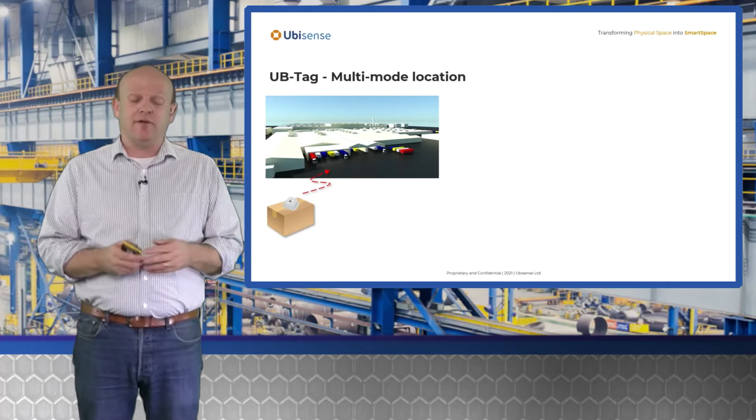In the loading bay, we may only want to know roughly where that item is. In that particular area, we can use Bluetooth Low Energy beacon sensing using a plug-in sensor like that. They're very, very cheap, to find out where that particular parcel is to within perhaps 5 or 10 meters accuracy. Then as that package moves through the facility, maybe it moves into a warehouse where perhaps we need slightly better accuracy, perhaps a meter or 2. There we can use exactly the same tag, transmitting Quuppa signals, and use the Quuppa location signal system to find out which particular area of the warehouse it's in.

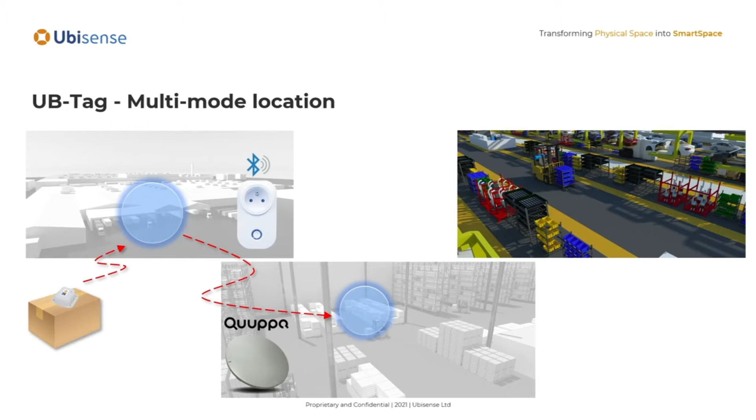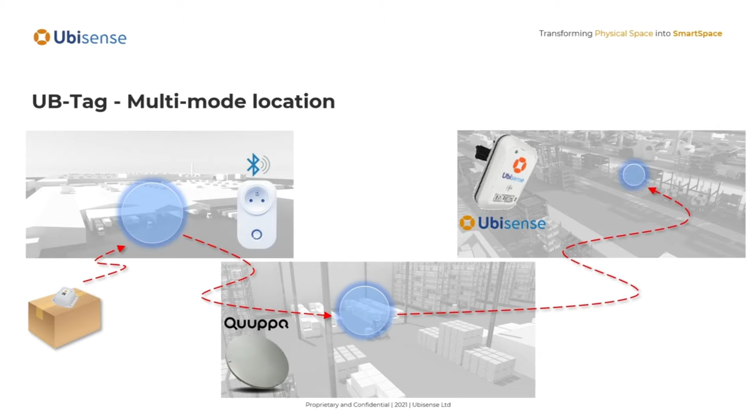We can also then use the same tag whilst the package is moved to line side, where there's lots of metal, it's a very challenging environment, and we need to know exactly where that particular item is, with the Ubisense system using our ultra-wideband technology to find very, very precisely where that tag is. So the same tag can be used all the way through the life cycle of a package moving around the facility using different location modalities to get the right balance of performance and cost whilst we're tracking it.

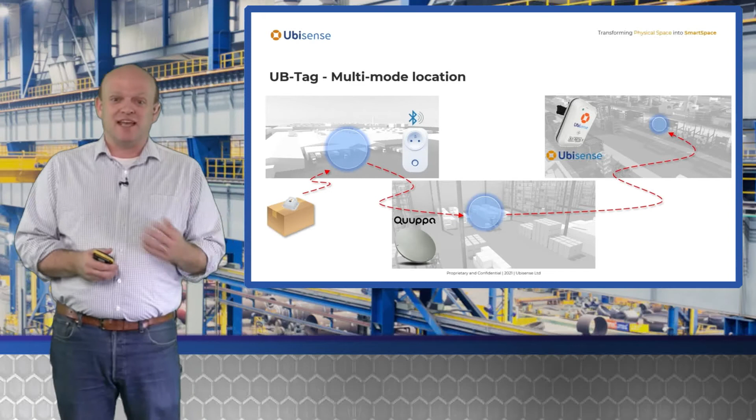We're doing all of these things simultaneously, and you might think that that means that the battery lifetime of the tag would be compromised. Not at all. The Ubi tag is actually our longest lifetime tag for a particular size of battery, and it's actually more than 6 times the battery lifetime of competing UWB tags using similar batteries.

So if we look at the battery lifetime of a tag which is transmitting ultra-wideband once a second continuously, so no cheating using accelerometers or anything like that to detect motion, something that's transmitting once a second all the time, then a Ubi tag will last for over 10 years in that mode. A competitive ultra-wideband tag might only last 1.6 years. So there's a big difference in the performance of the battery lifetime.

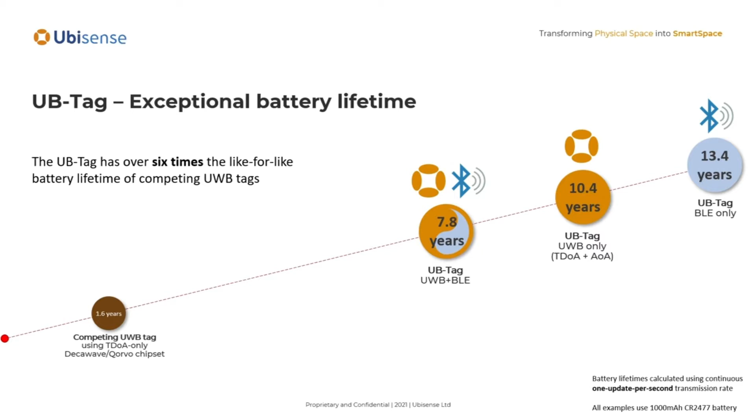If we look at the Ubi tag in BLE mode, it's over 13 years. And actually, we can do both of those things together, ultra-wideband and BLE, and still get nearly 8 years of battery lifetime out of a tag. So it's a very, very long-lived tag device. Now, because we're expecting these tags to be out in the environment for many, many years, we have to build them tough. And we've built the Ubi tag for industry.

It's very compact, so the main body of the tag is about the size of the top of your thumb. It can attach to anything and it's not obtrusive. It's tough, it's a sealed unit, tested to IP69K. Nothing can get in, it will last for a very long time. We've driven cars over it.

It has multiple BLE antennas, so it allows those technologies using BLE to work more effectively in tough industrial environments. And it has a magnetic button that allows us to interact with the tag by holding a magnet close to it, without actually having to put any kind of break in the case which might let in water or similar problems.

And it can be attached to all sorts of different items in lots of different ways. So we can use tie wraps, we can use screws, we can glue it to things. It even comes in different form factors where we don't have the mounting lugs, we've just got the main body, and as a watch type form factor that allows it to be used for tracking personnel.

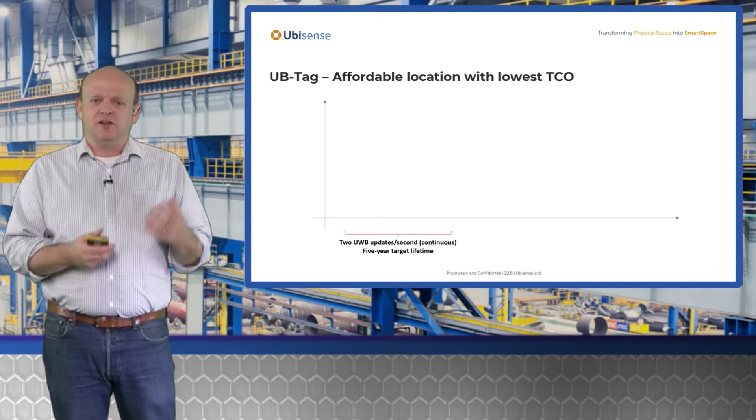It's also the lowest total cost of ownership tag that we can see out there. So if we look at an ultra-wideband application where we're using a tag for about 5 years, tracking it twice a second continuously, which might be the kind of level of performance we're looking for in a factory, the UB tag is cheaper than competitive ultra-wideband tags right from the get-go.

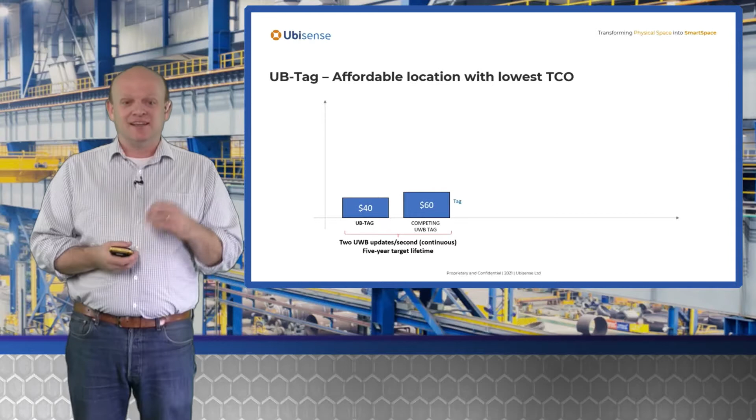But because we've got such a long battery lifetime, we also win in terms of the total cost of ownership. For that 5-year battery lifetime, the UB tag has got enough battery lifetime to get us through to the end with the battery that it had on day one. But that competitive tag needs its battery replacing roughly every year.

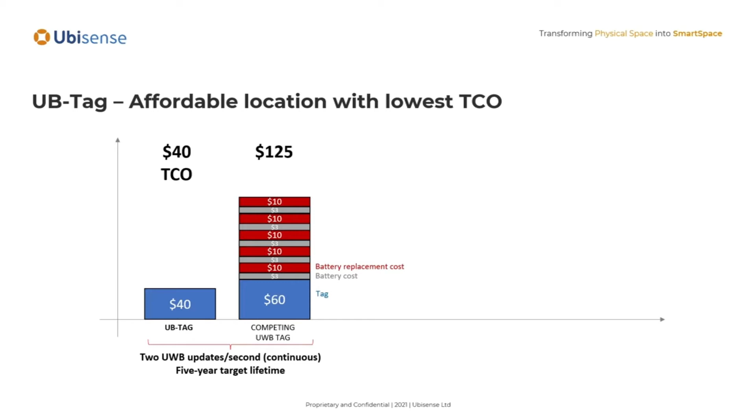So every year we have to pay for a new battery, and we also have to pay for the cost of going and finding that tag and bringing it back, changing the battery and putting it out there again. Now we've talked to our customers and that cost can be anywhere from $10 to $80 each time a battery change or battery recharge cycle is taken into account. Here I've assumed that it's at the low end of that scale. But by the time we've done that 5 times, you can see that the total cost of ownership of that tag over the 5-year period is more than 3 times the total cost of ownership of the UB tag.

And we can do a similar calculation in the BLE space. So although the UB tag is more expensive than competing BLE tags, they're extremely cheap, made in very, very high volumes, but they also have very, very small batteries. So the UB tag probably lasts about 3 times as long as one of those other tags. And again, by the time you've considered taking that tag, bringing it back, changing it for another one - these BLE tags tend to have sealed batteries - by the time you've done that a few times, the total cost of ownership of the UB tag is about half that of the competitive BLE technology. So not only is it our most capable tag, it's also the lowest cost of ownership tag.

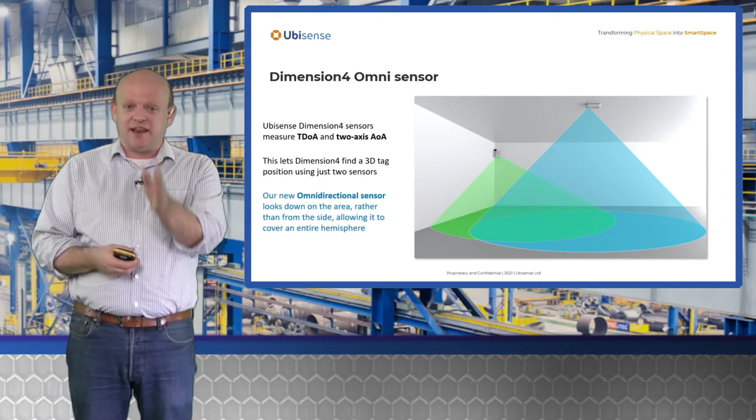Looking at the infrastructure side of things, we've introduced a new omnidirectional sensor. Our sensors are quite special in the ultra-wideband world in that we measure both time difference of arrival, the time of arrival of the signal coming from a tag at a sensor, but we also measure 2-axis angle of arrival - so we measure an azimuth and an elevation angle for that incoming signal. And that lets us find the position of a tag using only information from 2 sensors.

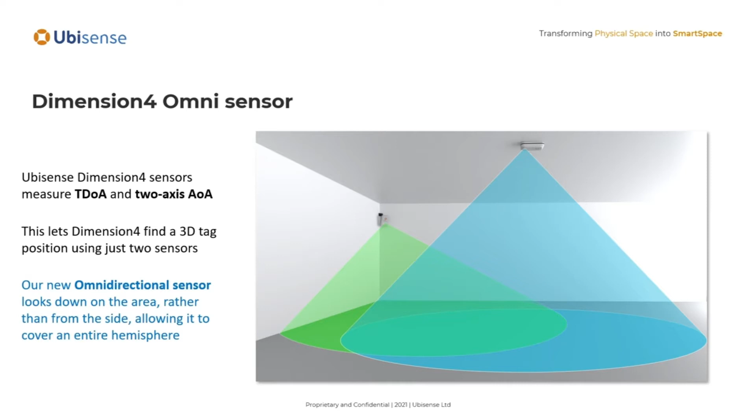But our previous sensors were directional, so they tended to be placed on a wall, looking into a space and cover a certain sector of the field of view that they were looking into. Our new omnidirectional sensor can be placed in the ceiling, looking down, and it has an essentially hemispherical field of view, so it makes it much more cost-effective to cover large spaces.

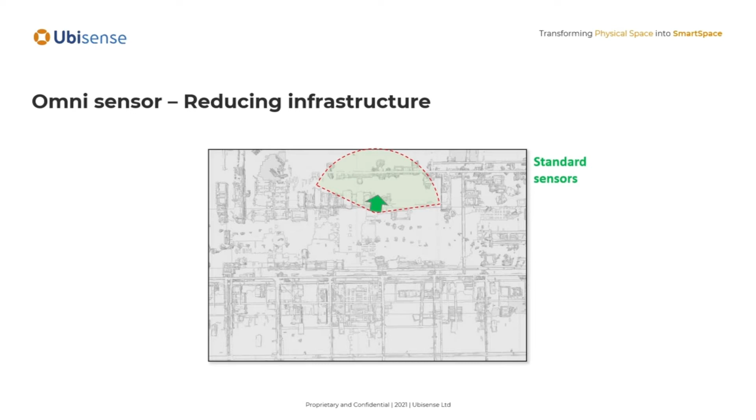I've got an example here. If we take this map and we say, what does it take to cover this with sensors? Well, if we use standard Ubisense sensors and place them in the middle of the space, each one would cover a certain field of view. And we'd have to connect that via cabling to a PoE switch, a power over Ethernet switch in a switch cabinet using Cat5 cable.

And obviously, if we want to cover large areas, we have to tile these fields of view so that the whole area is covered, and that involves a lot more cabling, more switches, and so on. But if we do the same thing using Omni sensors, we can do it much more cost effectively, with fewer sensors, fewer cables, fewer switches, and the total time to value is much reduced.

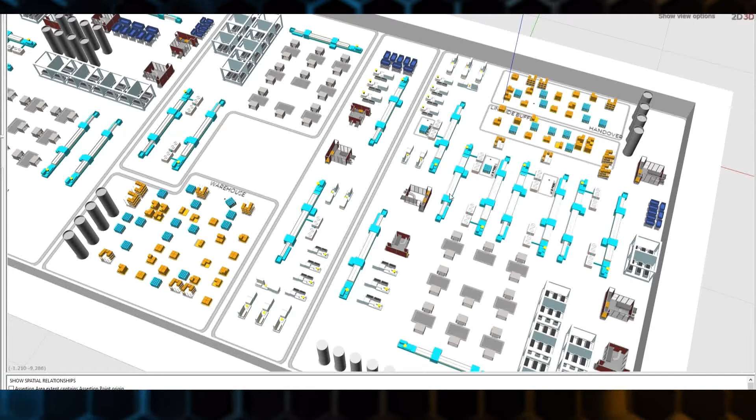Let's take a look at a typical manufacturing environment. Here we can see a Smart Space digital twin of a customer production environment. In this particular environment, what the customer is interested in is ensuring that the right materials, depicted by these blue pallets with stacked goods, are being delivered to the right locations in the material flow process at the right time. This is a really common problem, and many customers are looking to move away from traditional manual bookings into their ERP system using things like barcode scanners, because being manual, those processes can be both error-prone and time-consuming.

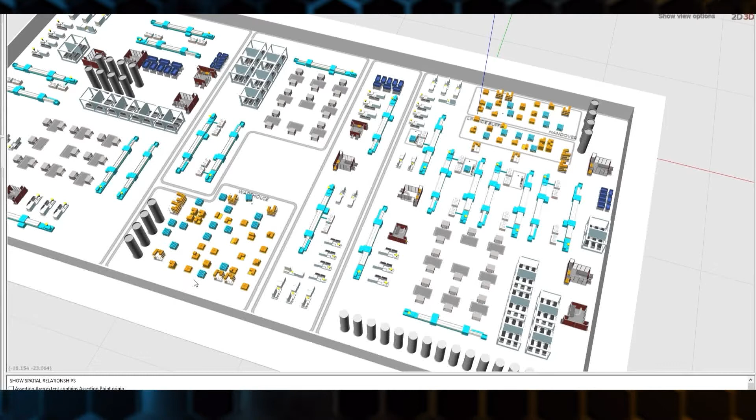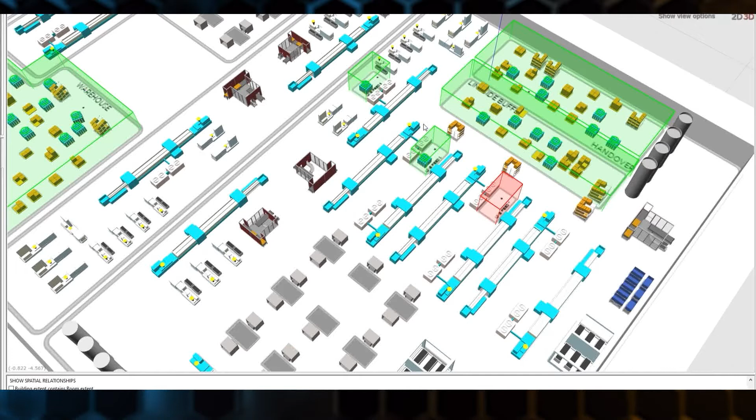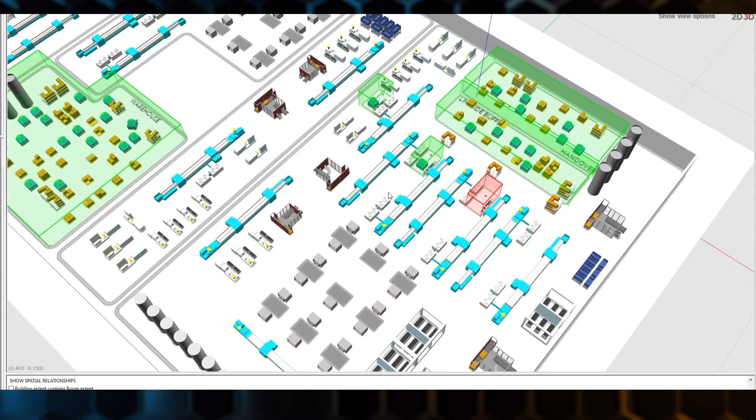So what we have in Smart Space is this ability to geometrically model the production environment and also build a spatial model that represents all the interesting areas, in this case, of the material flow process. As material flows from the warehouse to various downstream storage locations, and eventually to these line-side consumption points, we have smaller and smaller footprints for material to be located in, and therefore more stringent requirements in order to register material arrival in each of those locations. This implies an increasing level of location accuracy requirement for materials arriving at each of these locations.

This is therefore a great example of what can be achieved with a multimodal tracking system using the UB-Tag that Andy's introduced and Ubisense OmniSensors. So in this area here, where we've got fairly small zone requirements, we can achieve wide area coverage across these line feed locations and these nearby storage buffers with Ubisense OmniSensors, and they will allow us to track this material with pinpoint accuracy to guarantee the correct association between those materials and the various control points in the material flow process.

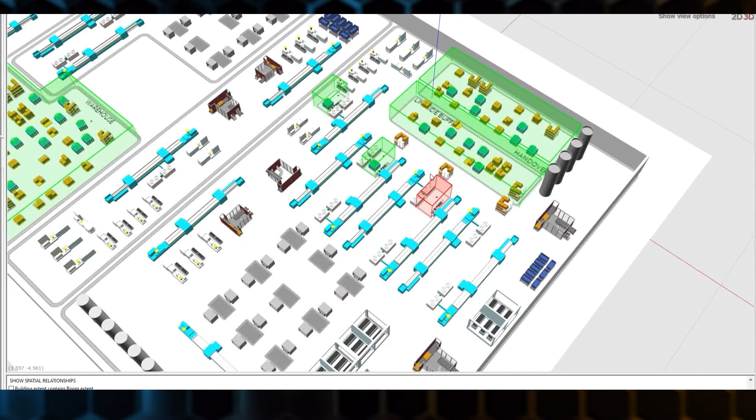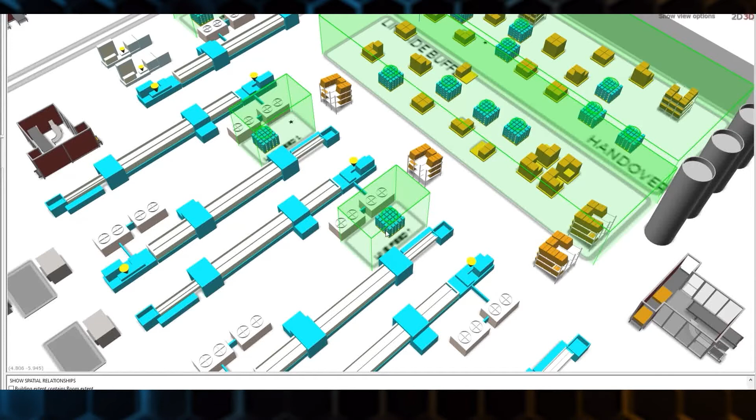So you can actually see an example right here. If I get this pallet over here to move into one of these line feed locations, you can see that this pallet is now being tracked to around 15 centimeters accuracy, and we get a highly reliable spatial trigger as that material arrives into this tightly defined line feed location.

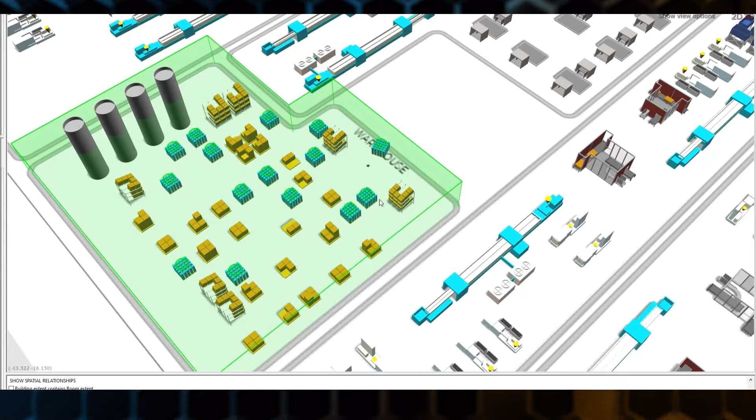If we now zoom out and shift over to the warehouse as another example, what we can see here is pallets are stored in a fairly large area, and the spatial zone that represents the warehouse is much bigger. By way of comparison, we can see that the required location accuracy to confirm materials inside the warehouse is much lower. In fact, what we can see here is a pallet that's being tracked also with the UB-Tag, but in this case, we're using a lower cost angle-of-arrival based Bluetooth low energy real-time location system with a typical accuracy of about 1.5 meters.

And that would be perfectly acceptable for confirming and asserting that materials are located in this warehouse, and also going and finding those materials if needed using a map. So in doing so, we're able to use the best of multimodal sensing capabilities to achieve reliable location data everywhere in the material flow process.

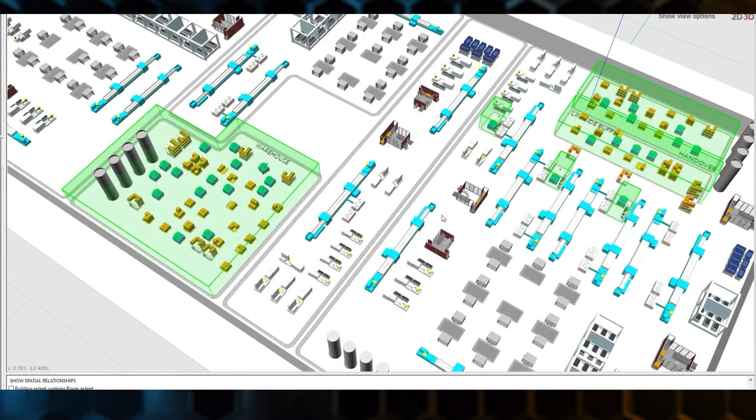So let's now switch over to see how that material flow information can manifest itself inside SmartSpace and be consumed by business users on the shop floor. Here you can see a simple overview dashboard built using SmartSpace of all our material status information. We can see exactly where we have material shortages. In this case, we can see our line feed locations are all lacking material availability.

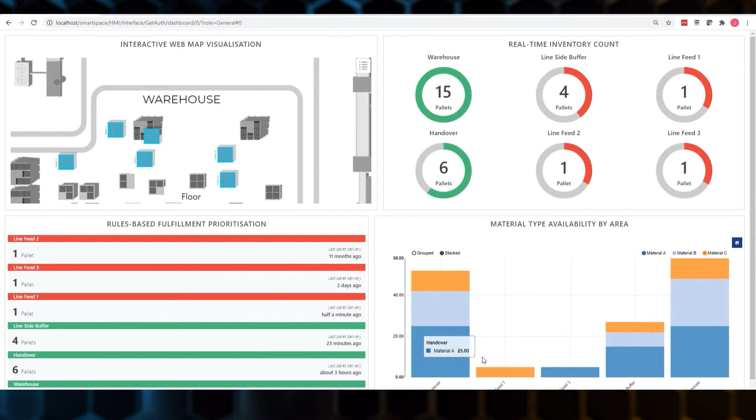And we can also, using SmartSpace's process logic capabilities, build things like prioritization capabilities that tell the fulfillment team where materials are required the most urgently. We can see in real time where all of our pallets and materials are located, and we can see those movements happening in real time on the map.

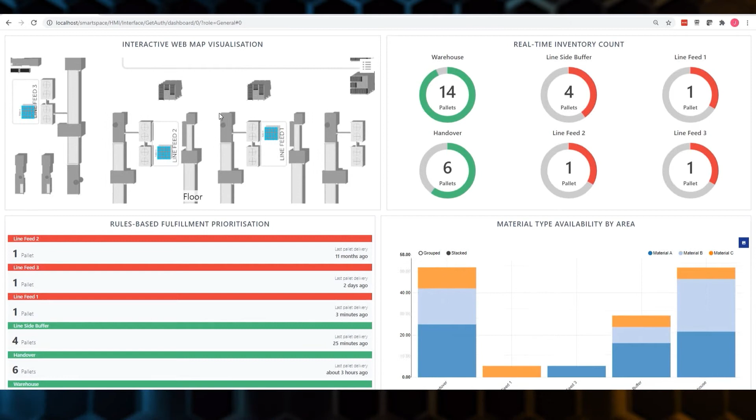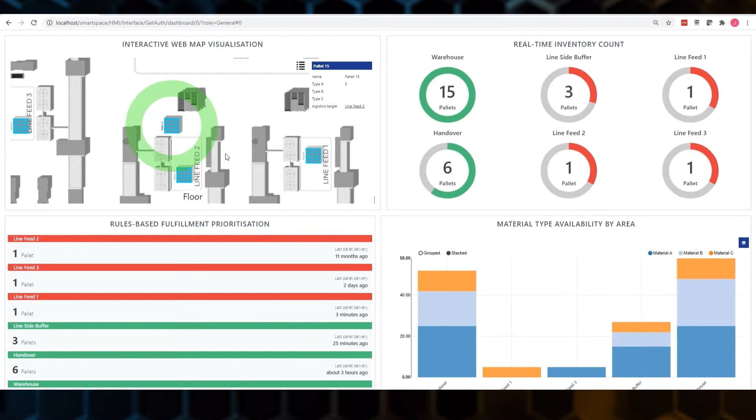Let's say I wanted to request that one of these pallets moves down to line feed number 2. I can immediately move that pallet to line feed 2. And we'll see in real time, as that pallet arrived, our line feed 2 material increments, and the amount of material we've got at various locations changes as well. And the priorities for our fulfillment have changed because line feed 2 is no longer lacking materials.

Now we can head back to Andy to get some more exciting product updates.

Thanks, John. Now I'd like to talk a little bit about how we go about deploying our systems. The stages in which we deploy are typically split into 4 components. First of all, we'll go and survey a particular site that a customer has invited us on to take a look at. And that's really about understanding site environment and the application that the customer wants us to implement.

Once we've done that, then we can start planning the sensor system that supports that application. And that's really got 2 areas. We look at the sensor layout, work out where the sensors might be placed and so on, what fields of view they have, and then check that will provide coverage that's acceptable in terms of application performance and so on.

Then we'll go on to install the sensor system, and that involves placing cabling to support those sensors and actually physically installing the sensors themselves. And finally, we'll calibrate the system. That means surveying where the sensors are placed and orientating the sensors and so on, and then checking that the system is working properly and meeting the performance requirements that we originally set out.

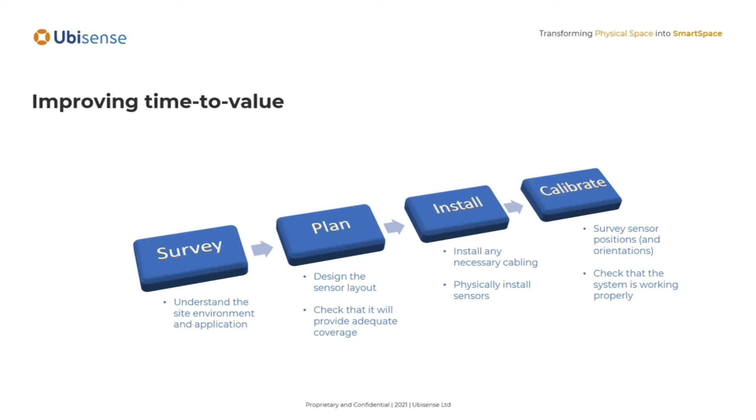So our aim in development is to try and improve the time to value here for the customer as much as possible by shortening these areas as much as we can.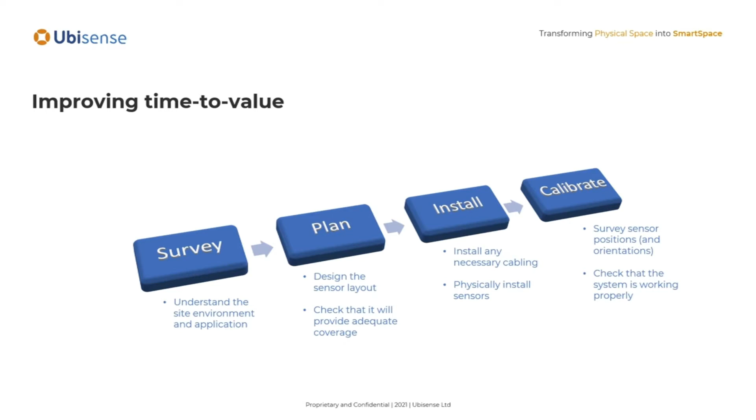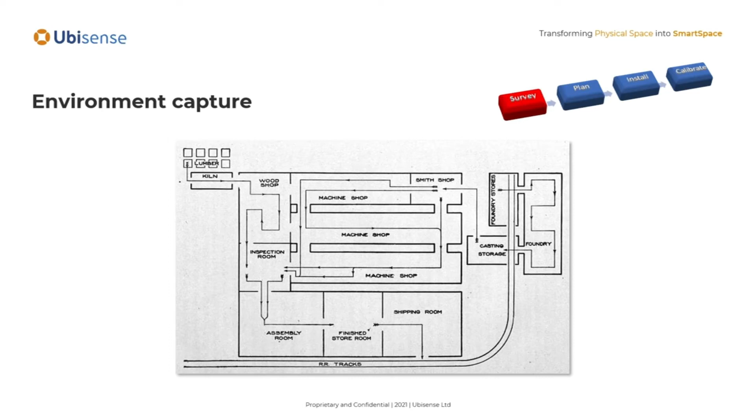So if we look at the environment capture area, the survey, the way that this used to be done is that people would come to us with a floor plan for a facility, and we'd try and work out from that where we might place sensors, where in those areas the sensors could see, and so on. The problem was that no floor plan that is in existence for any building is exactly right, and it doesn't really tell you much about how the building's being used.

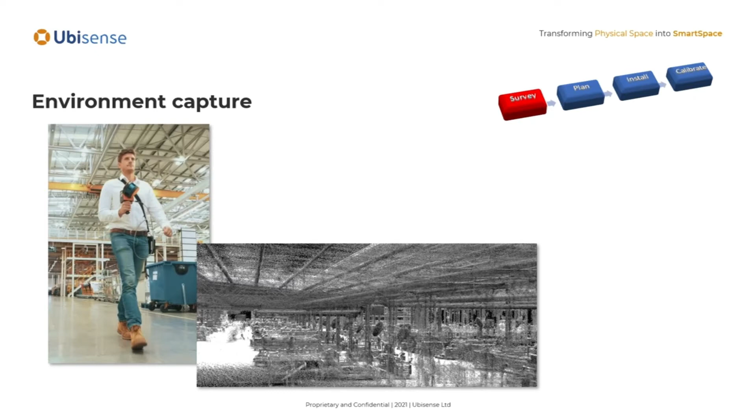Now, the point cloud by itself isn't tremendously useful, but we have tools that turn that point cloud into a 3D model with walls and equipment and so on. And we can use that model in lots of ways to then improve the subsequent stages of our installation.

So we can take that model, for example, and in the next stage, planning the sensor system, work out where the optimal places and the optimal number of sensors are going to be. We can take the model and place virtual sensors inside it and see exactly how they're going to be obstructed by items in the factory, walls, equipment, and so on, and add and remove sensors until we've got exactly the right balance of performance and cost for the particular customer.

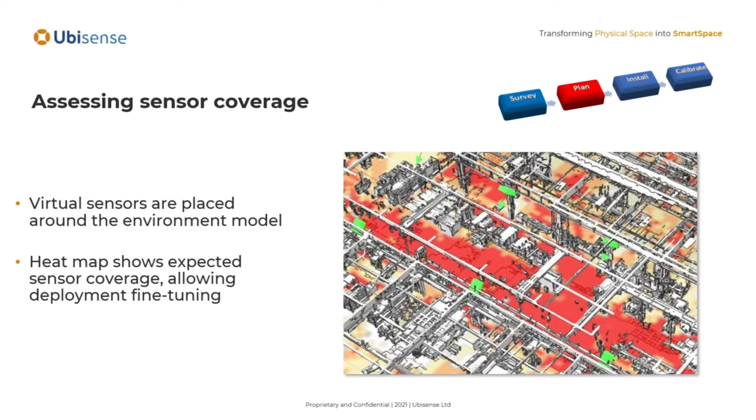So if we see, for example, on this heat map, that there's an area that's shadowed by a set of machines, for example, and we need to place another sensor in, then we can do that virtually before anybody has gone to pull cables out and so on.

Once we've got an optimal sensor plan, then what we can do is we can work out whether the performance of the sensor system is really going to match the application requirements. We can send virtual tags into the space and use exactly the same algorithms that we'll use in the final sensor system to analyze signals, virtual signals sent from those virtual tags to our virtual sensors, and check to see what the performance of the system is at any point in that space.

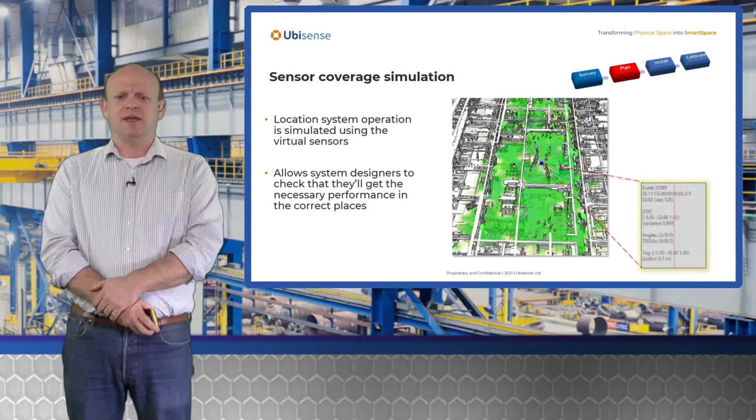So here, for example, if you look at the bottom right, you can see that the tag is predicted to be accurate to at least to at most 0.1 meters at that particular point in space. So it's pretty good there, and we're pretty sure that the sensor system is going to work well in that particular place. Now, at that point, we know where the sensors are going to be.

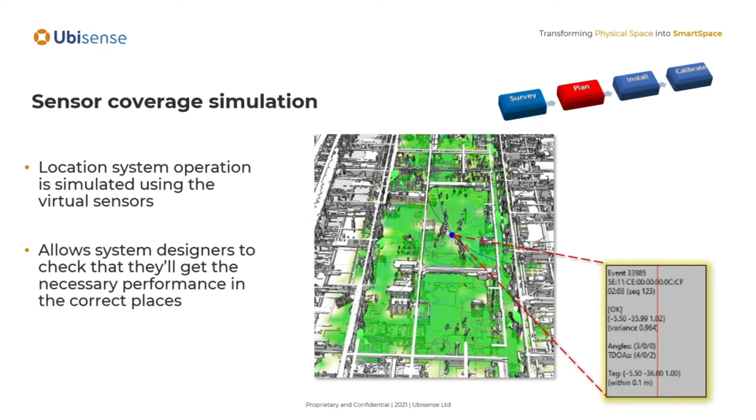So we can go and pull the cables to those points and install sensors at those places. At that point, we need to do our calibration. Now, the traditional way of doing that was using what's called a laser total station. This is a kind of piece of surveying equipment, and it allows us to find exactly where those sensors are in a facility to within a couple of centimeters accuracy.

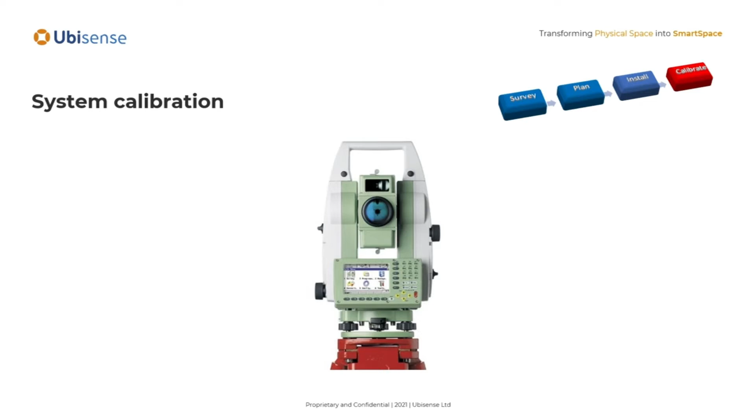And we need to do that because if we want to get centimeter level ultra-wideband positioning out at the end of the day, then we need to know where our sensors are to a similar level of accuracy. The problem with these things is that they're quite cumbersome and time-consuming to use.

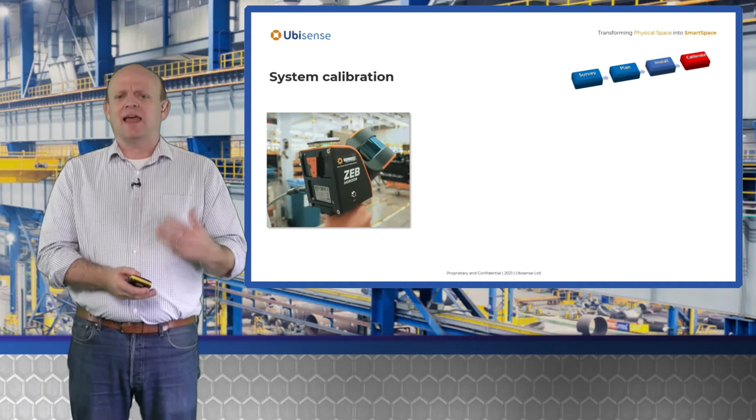And at the same time, we're measuring signals from the Ubisense system, and we marry those two pieces of information up. The laser scanner lets us work out exactly where the sensors are, exactly what orientation they're in, and it automatically self-calibrates the system. So this patent-pending technology allows us to calibrate even the most complex location systems in the time it takes to walk around the facility.

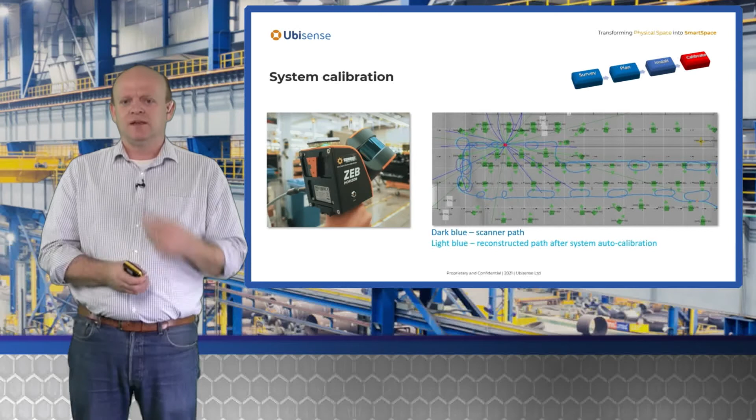This here is an example of a calibration that we did at a car assembly line. And it's actually got two traces on there, although it's very hard to see the difference between them. The dark blue trace is the path that the scanner walks around the facility, and the light blue trace is the results that we got from the Ubisense system after it has automatically calibrated itself from that scanner run.

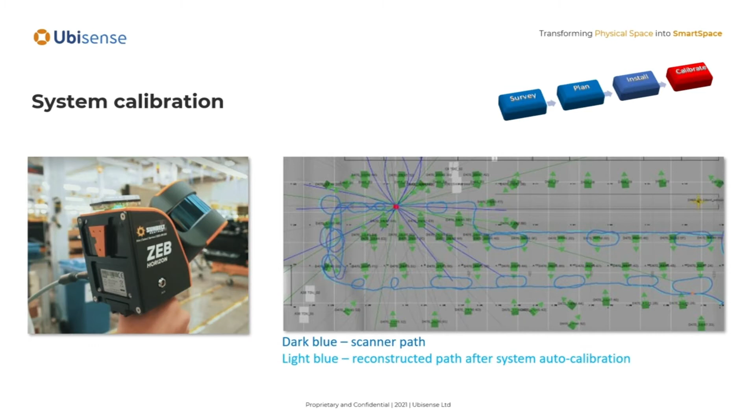The fact that you can't really see those two traces as distinct means that the accuracy of the system is incredibly high there. In fact, the accuracy of auto-calibration is higher than the manual approach that we used to use. So we've actually been using this over the last couple of months in some of the biggest deployments that we've been doing over that time, and it's really proving benefits.

So for example, we've done a large car assembly plant using this technology in the US. And that's important because car plants run pretty much 24/7. You get very, very small breaks in which you can install and calibrate a system. So time to value there is all dependent on being able to get in, install the system, calibrate it, and get out.

Similarly, we did a large US bus depot, and the trick there is being able to do that whilst buses are driving around at high speed through the depot doing their normal runs and so on. And again, the ability to be able to do this in just a couple of hours across this huge bus depot really was beneficial for our team in the US and for the customer as well.

We've also been using it in the UK. So we've installed a pop-up eye clinic at a shopping centre in London using this technology. And again, time to value is important for these guys because, of course, it's a pop-up clinic. It's meant to be quick and easy to install the system to support what's a potentially temporary installation that has to be installed very, very quickly.

And we did the same thing at a national security site in the UK as well. Here, the challenge really was that the people running that site don't want us on site. They don't really want anything to slow down their operations or for anybody to really be interacting with that site at all. So the auto calibration allowed us to get in, do the calibration, and get out as quickly as we possibly could. And of course, the customer is very happy about that.

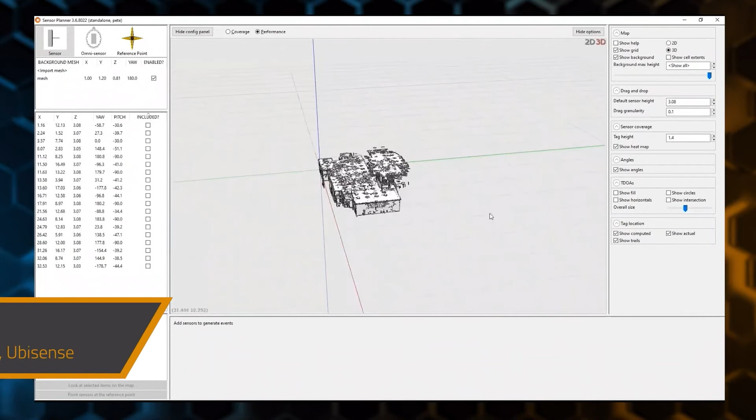So what I'm going to show you now is a brief introduction to our new Dimension 4 Sensor Planner tool, which is going to make system planning fundamentally easier and more reliable for anyone who's working with the Dimension 4 system.

The first thing you'll see here is that we have automatically generated a three-dimensional model out of a point cloud generated with one of the approved handheld mobile LiDAR devices that Ubisense has been designing around. What you'll see here in this model is that we've captured an awful lot of the structure of the building that we've walked around with the device.

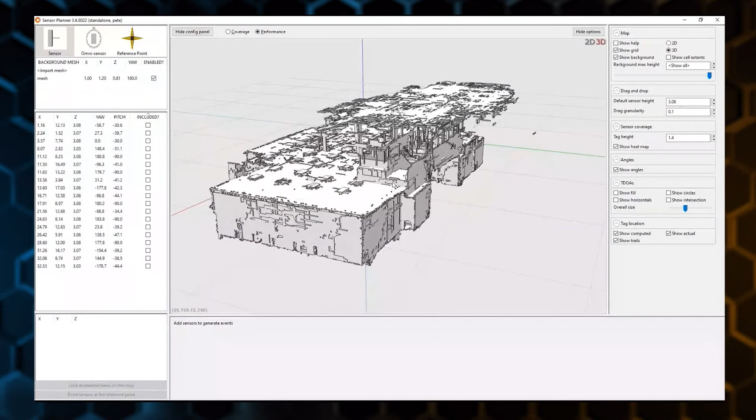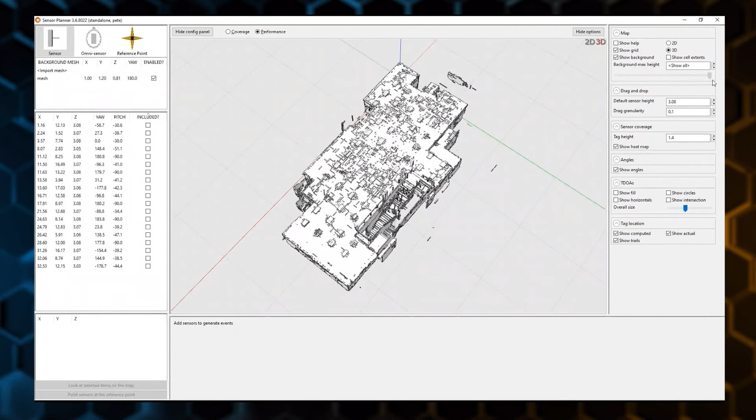Now, in order to use the auto-generated model to perform sensor planning, we need to focus in on the area we want to do our sensor planning design around. We can take all the high elevation and roof details off, so we can see inside the building where we want to create our sensor plan. Now we've got a full site model where we can create a sensor plan and analyze sensor system performance in any of the required tracking areas for the customer.

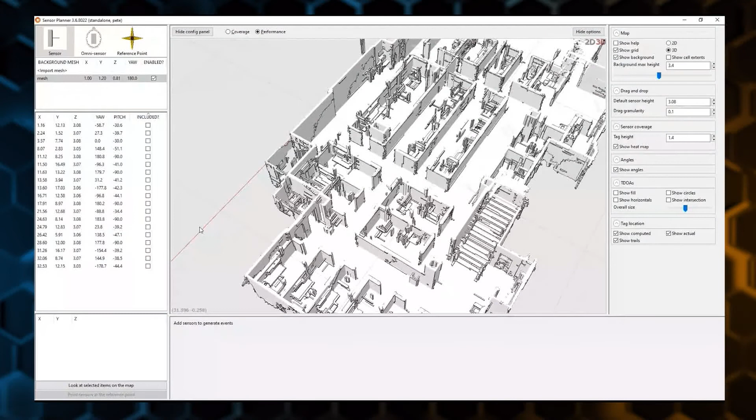So let's take a look now at what it means to actually build a sensor plan and look at sensor system performance. Let's start by taking a look at this little room area over here.

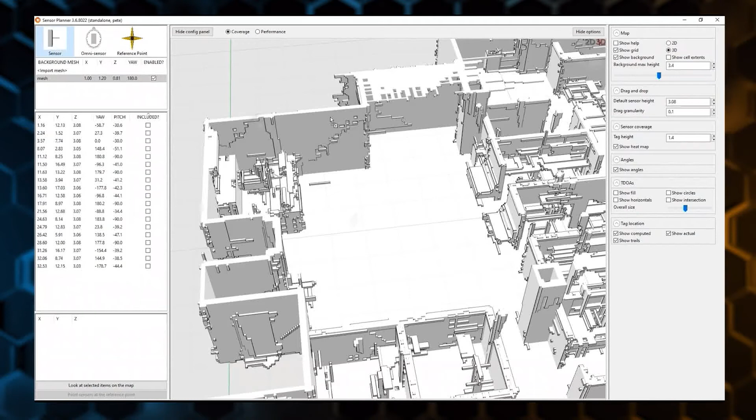All we need to do with the sensor planner is decide what type of sensor we want to deploy and drag it into the environment. So if I come up to the top left where we've got sensor, and drag one down into the environment, the system is smart enough, if I drop it near this wall, to know that I'm wanting to snap that sensor to that surface, which represents a wall structural surface in the environment.

So if we now want to reorient that sensor to make it point into a different part of the environment, we literally just shift-click into the model, and that makes the sensor point at where our mouse is located.

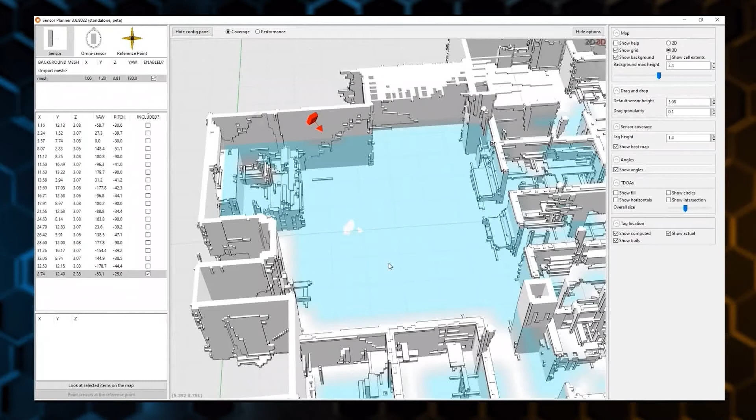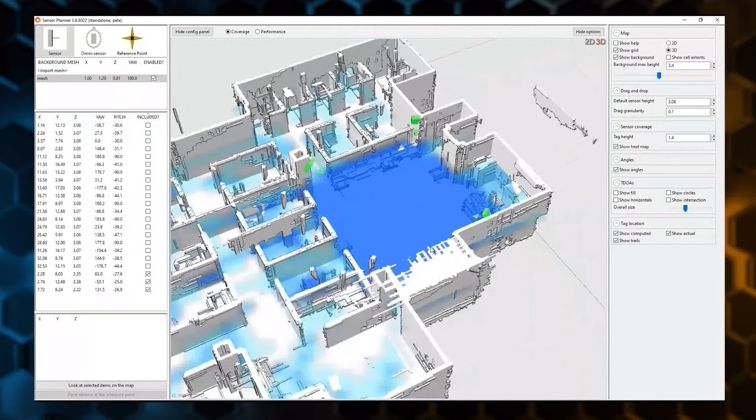Let's go ahead and start dragging a couple more sensors into the environment, so we can see what a more general coverage area looks like with the sensor planner tool. A couple more onto this corner here, and one last one in our final corner.

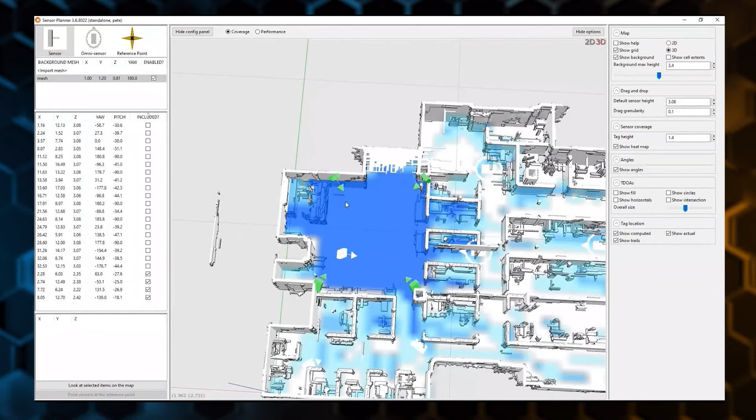So what we end up with once we've done that is this blue colored, almost like a heat map, that is spread out across the building space. The blue color and its depth gives us an indication of the amount of tracking coverage and confidence in the tracking we'll get in each of those areas. A darker or deeper blue represents a high degree of confidence and reliability in our tracking, and as the color fades into lighter blue and eventually white, that is a decreasing level of coverage—white basically means we've got no sensor coverage in that area.

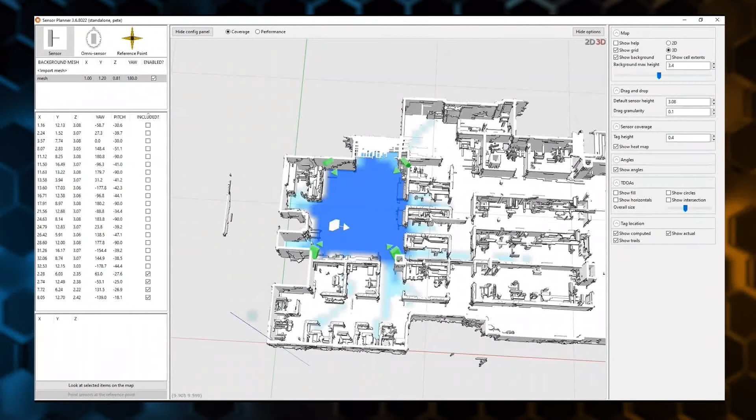Now, the coverage map that we have is planar, and so we can come over here and actually adjust the height of the coverage map. The system recomputes the coverage, taking those new structural characteristics of the model into account, and you can see the amount of blue in our coverage map has reduced.

So you can see, for example, over here where we are behind a desk, the sensor system at that height wouldn't be able to see behind the desk through the structure of the occluding desk. So the model takes all of those structural complexities into account when we're working out this coverage map.

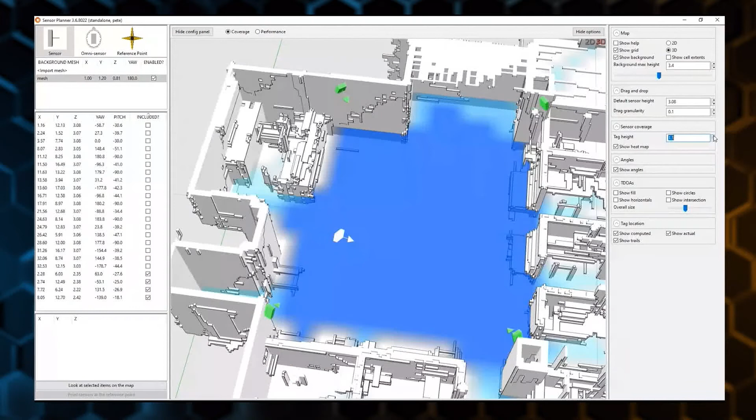The last thing I want to quickly show you is we switch now to a site-wide view, and I bring in a model that I have prepared earlier where I have deployed sensors all over the environment to give you an idea of what a full coverage map looks like. I'm going to apply some default values to all of my sensors that are in this sensor plan.

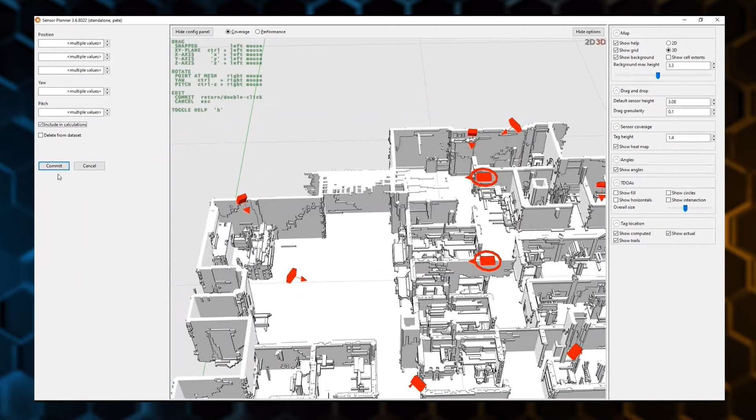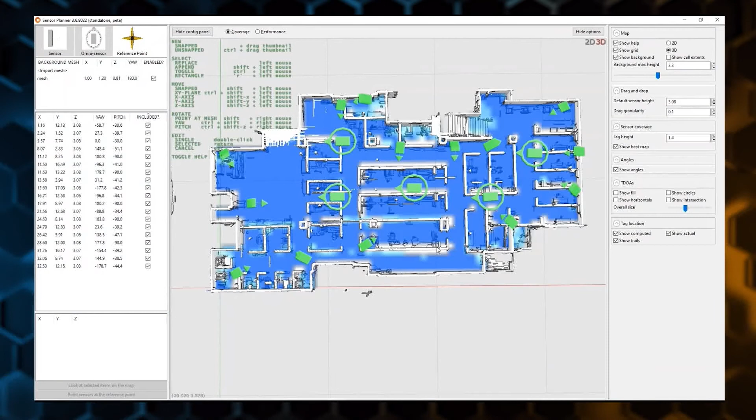And recalculate the coverage across the site. We've got lots of sensors across the site now. The system is now computing all that coverage heat map, and as that starts to get filled in, you can see across an entire facility - and this could be as big a facility as you like - you get this bird's eye view of the quality of your coverage for all the sensors you've placed into the environment. So that's all from me, back over to you, Andy.

Thanks, John. Whilst we were watching John's demonstration, a question came in which asked whether we could periodically do that same calibration task in a factory after the system's been installed and running for some time. And the answer is absolutely yes, we can. That's a really good idea as part of periodic maintenance, to check that the calibration of the system is still as good as it was on day one, because as we all know, factories are dynamic places - things get bumped all the time.

It's really important to make sure those things happen. Now, we've got lots of health monitoring, as Wolfgang from Daimler mentioned earlier, that tell us about what's happening in a factory, but that kind of periodic health check is not a bad thing to be doing with any large-scale location system.

So the last thing I'd like to talk about is outdoor centimetre level positioning. Obviously indoors with technologies like ultra-wideband, we can track extremely precisely. Also we've done an awful lot of work outdoors with technologies like GPS. Everybody understands how GPS works these days - we have a mobile device, some satellites, and we measure signals from those satellites at the mobile device to find out where it is.

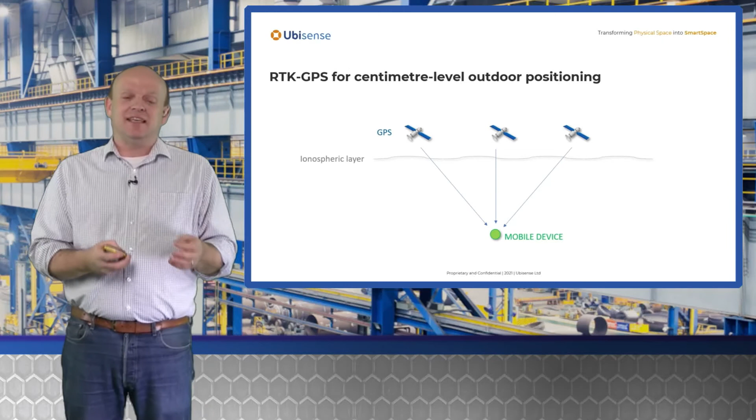In principle that's extremely accurate, but in practice the accuracy of standard GPS is maybe in the 5 to 10 meter range, due to signal errors introduced by passage through the ionosphere of the Earth. And that limits the applications we can use GPS technology for outdoors. It's a great technology, very low infrastructure, but it's just not that accurate for some of the things we're doing.

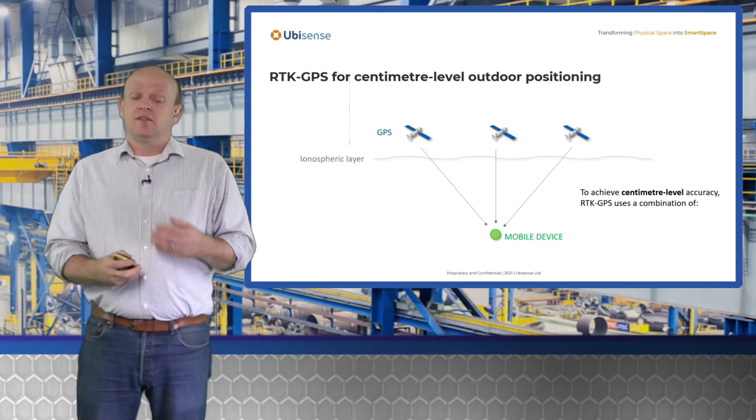So we've been interested in how we can do centimetre level positioning outdoors, and a new technology called RTK GPS is something we think is very interesting. The way RTK GPS works is it layers a whole bunch of technologies on top of each other to get fantastic outdoor accuracy.

The first thing it does is use what are called carrier phase techniques, where it looks very carefully at the incoming signals from GPS satellites to essentially count how many wavelengths of signal there are between the mobile device and the satellites. That gives us some extra information about where the mobile device is.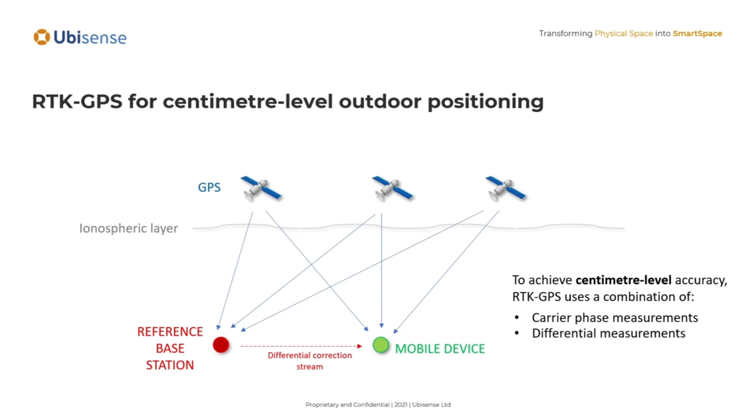It also uses what are called differential techniques. It uses a reference base station placed somewhere near where you're trying to track the objects - perhaps a fixed area of the factory, a particular base station placed in the factory somewhere. It looks at the same signals from the same satellites passing through the same part of the ionosphere, and looks at the errors introduced into that reference base station location by passage through the ionosphere. We send those observations as corrections to the mobile device, which subtracts them, and then hopefully we get a more accurate measurement of the satellite signals.

As it happens, each satellite also transmits multiple different frequencies - there are military frequencies we can use, and so on. So now in RTK GPS, we use those as well.

And then finally, there are lots and lots of different kinds of global navigation satellites out there now - there's GLONASS, which is Russian, there's Galileo, which is European, and there's Beidou, which is Chinese. All of these systems transmit signals we can receive at both our base station and our mobile device to figure out exactly where that mobile device is. The difference is really along the lines of, rather than measuring say 8 signals at our mobile device, now we're measuring about 60.

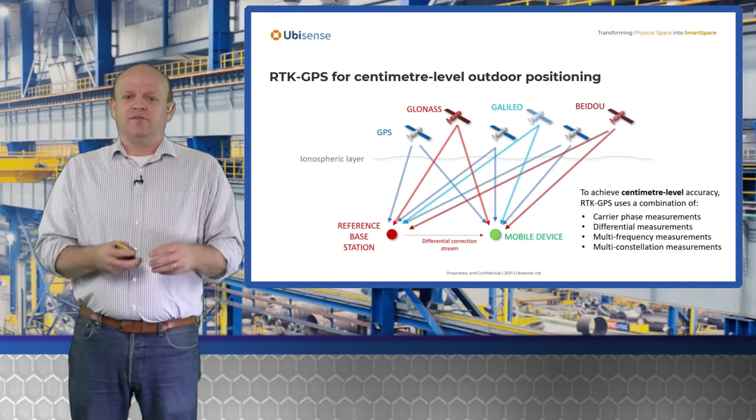That increase in the number of signals we're measuring, the amount of information we've got, and the ability to use differential techniques means that we can get incredibly accurate positioning. So the kind of performance that we see is shown here.

These are two examples where I took an RTK unit around our parking lot here in Cambridge. I walked around my car and you can see clearly the path as I walk around the open door of my car. Then I tried to trace the parking space number that's on the floor. You can see the scale roughly against my hand there, and it's very, very accurate.

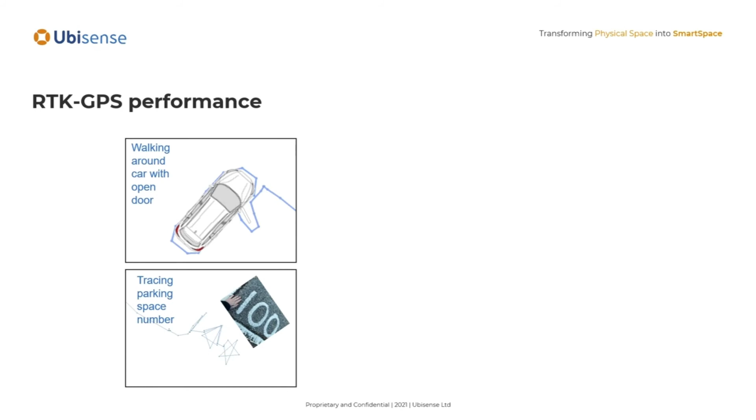You might say, why has it got a star at the bottom rather than a zero? The reason is we're only getting one update per second, and I was moving the tag around that zero too fast. But all of the points on that star are on the zero. I can really guarantee that it's accurate to about one centimetre.

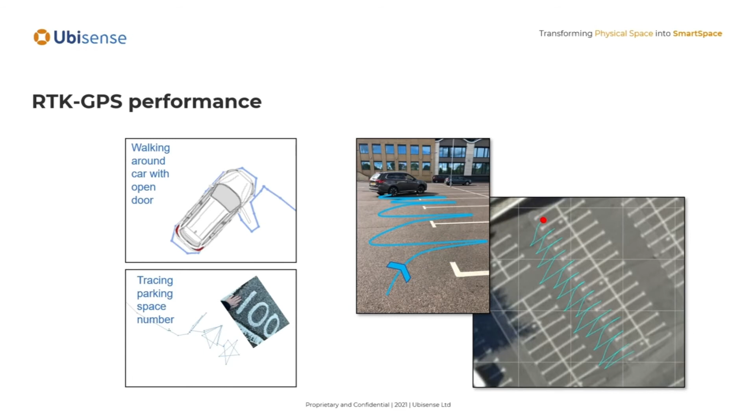This is the kind of thing we're going to be using it for. This is an example where we took a car, equipped it with an RTK GPS unit, and drove around our parking lot. You can see exactly which parking bay we were in at any time. The amount of infrastructure required to do this was one receiver. So this is an entire car parking yard covered using one receiver, with centimetre level accuracy everywhere.

We're taking that technology and combining it with ultra-wideband to allow seamless indoor and outdoor tracking. Indoors, that tag will use traditional ultra-wideband technology from Ubisense, accurate to a few centimetres. Outdoors, it will use RTK GPS techniques and figure out where it is, then send that information back to the Ubisense Smart Space software, either over a local area, a wide area, or a cellular network.

Now, there's got to be a downside to this, and the downside is simply power. GPS is quite a power-hungry technology, so when we're using RTK GPS we have to be powered by a piece of host equipment. This isn't something we'll be placing on large numbers of pallets or items stored in an area. Rather, we'd be tracking things like the forklift used to move those particular items, or perhaps cranes, or people using smartphones.

This technology is already being used by Ubisense in customer trials, and it's going very well. We see lots and lots of applications for this in the future. For example, forklifts tracking items that are placed indoors and then taken outdoors and stored in storage yards. That's a perfect example for using RTK GPS.

We have a power source. We can even work out the orientation of the forklift by putting two of these units on and seeing how they move relative to each other.

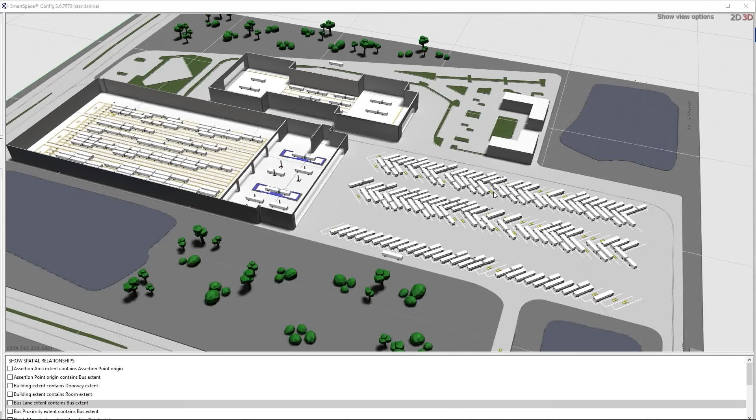This RTK GPS capability combined with ultra-wideband truly gives a next level capability around indoor and outdoor high accuracy tracking. What you can see in this smart space demonstration is a large bus depot where we have a high population of buses being tracked indoors and outdoors.

The first thing you'll notice is how cleanly snapped all the buses are to specific bays in the yard and specific lanes inside the bus depot, ready for pullouts on the next shift. With that high accuracy location both indoors and outdoors, we can very reliably manage both the buses and our space utilization in the yard.

We can see for every single bus lane exactly which lanes are occupied and how many buses we have in there right now. And we can also see with a very high degree of confidence which bays in the yard are currently occupied and which buses are in those bays right now.

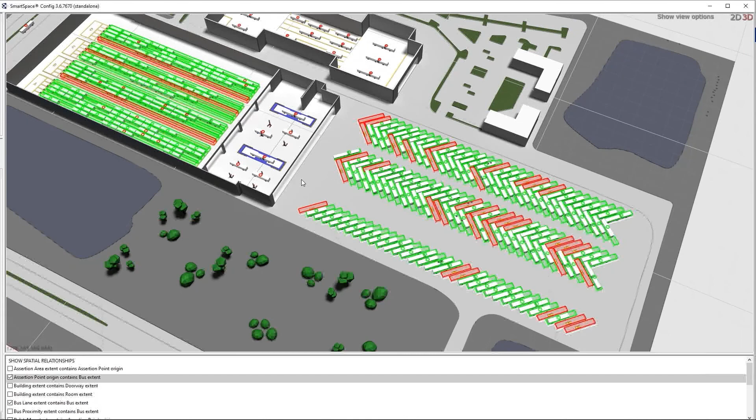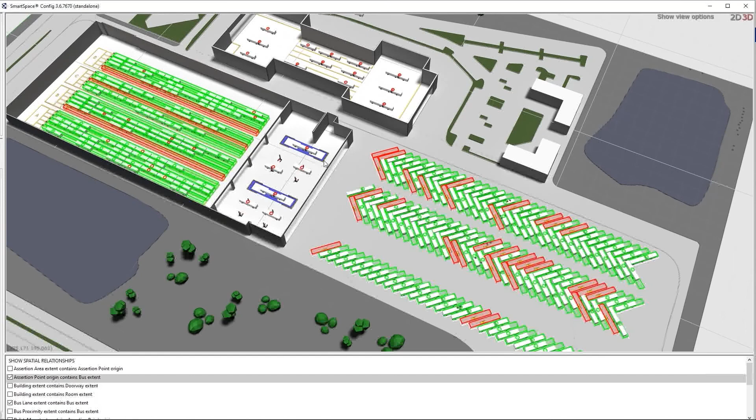The other thing that this model tells us, being able to track seamlessly indoors and outdoors, is exactly what process areas our buses are in right now. While we have yard storage for buses, particularly those requiring maintenance, we also have our indoor lanes ready for next morning pullouts, and various wash, fueling, and maintenance areas.

SmartSpace gives us a lot of detail about exactly what process and step our buses are in right now in our depot. So we've got an awful lot of valuable underlying data in this SmartSpace digital twin.

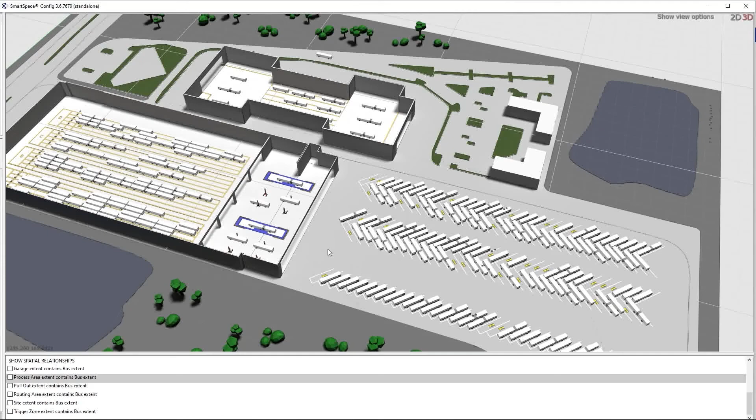Like with many other SmartSpace applications, we can deliver that information to end users in custom web user interfaces that not only tell you where your assets are located, but also an awful lot of valuable status information.

Here we have a live web map view of our depot, and our buses are color-coded to indicate their current status. In this case, the color of the bus indicates the current maintenance level of the bus and its readiness to be allocated to the next round of pullouts.

If I click on any particular bus, I can see a bunch of information pulled from our depot management system that is now easily visualized against the bus in SmartSpace about the status of that bus. I can see buses requiring maintenance, what's wrong with them right now, and click into those buses to get more useful information.

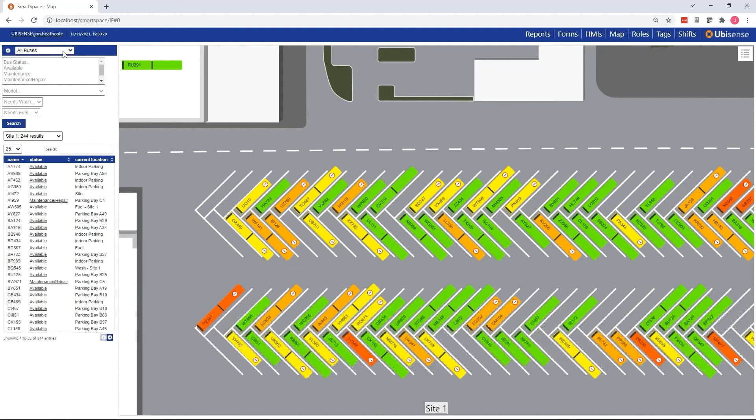What's great about this as well is I can use this web interface for managing data on our buses. So let's say I wanted to allocate one of these buses to a particular route. I can zoom in, find one of my green buses that's available, and as soon as I allocate that to a particular route, the status of that bus will automatically update.

SmartSpace automatically changes that bus's appearance so that everybody knows it has been allocated to a route, and I can see what route it's due to go on and when it's due for pullout.

The SmartSpace web map gives us many different ways of visualizing our asset information, in this case the status information of our buses. We can also see down the bottom here, we have a large collection of buses awaiting maintenance.

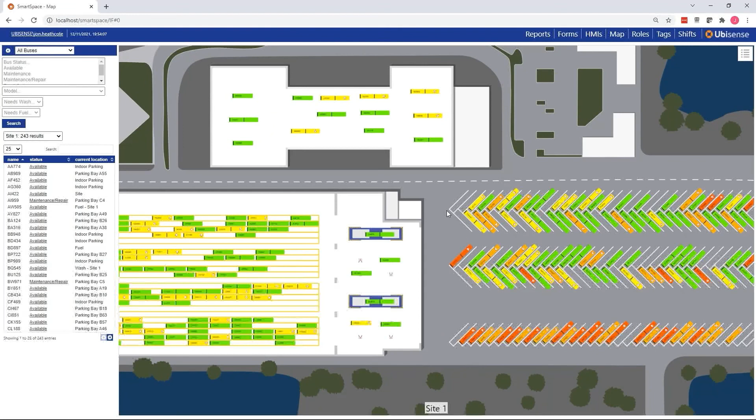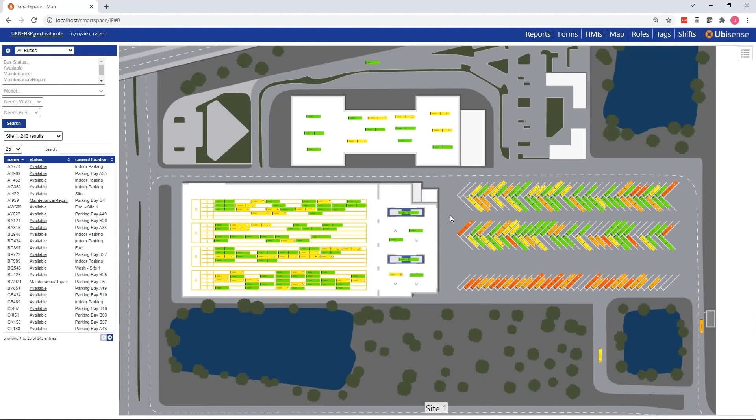As can be seen, SmartSpace, and particularly SmartSpace combined with these seamless indoor-outdoor tracking capabilities, gives depot managers the ability to visualize in a highly reliable way exactly where all their buses are and gain a bird's eye view of the status of all buses across the yard at any time. Thanks, and back over to you, Andy.

Thanks, Jon. Steve, did we have any questions during? Thanks, Andy. Yeah, we do. We've got quite a few, but I'll ask you a quick one.

Someone asking about the Omni sensor, about the range of the Omni sensor, as in what sort of ceiling height is appropriate for that product. So the range is in the sort of 30 to 40 meter distance. The ceiling height that we've used it on typically so far has been up to about 5 meters, but I think it could go quite a bit further than that. At some level you start using the range to get from the sensor in the ceiling down to the floor rather than out and covering an area. So that's something we'd look at with a customer regarding their particular site.

Fantastic. Thanks, Andy. It sounds like that's a challenge for the person that's asked the question. We'll find out precisely just how high that ceiling is that we can mount it on. Thanks so much for your questions. A reminder just to submit them into the panel when you get the chance.